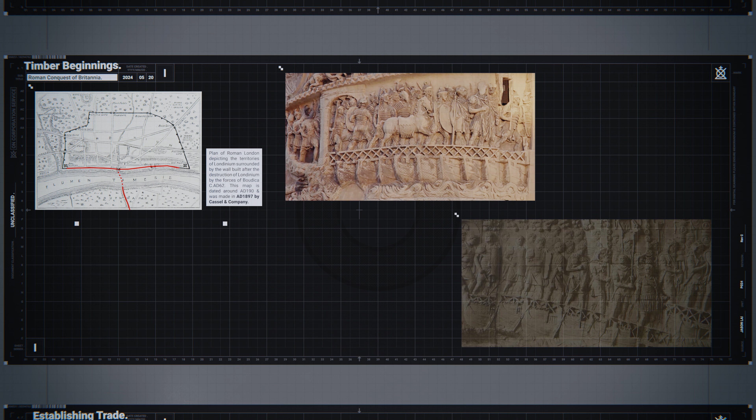In AD 75, after successfully invading the Celtic settlements, the Romans constructed a permanent bridge. Similar to the Rhine Bridge depicted by Palladio in 1570, it can be speculated that a similar Roman timber-piled bridge was deployed at a settlement to establish a permanent avenue for trade.

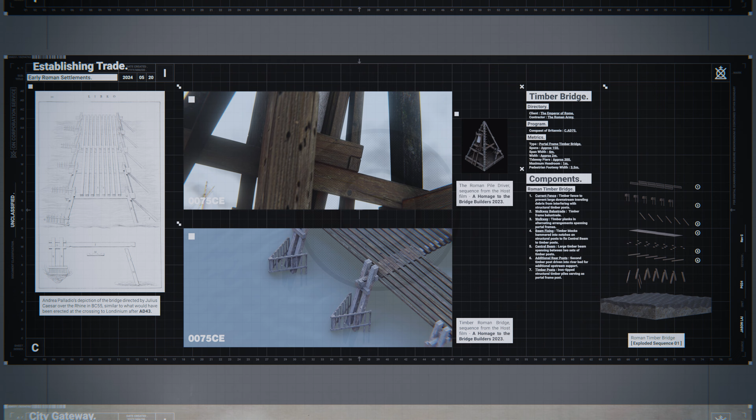In 1209, following the destruction of a series of intermittent timber bridges, the newly appointed Bridge House Estates funded the construction of a new permanent stone bridge. Built at the entrance to the City of London, it included a series of dwellings, shops, and a chapel, a small community created by the Bridge House Estates to generate income for the maintenance of the crossing.

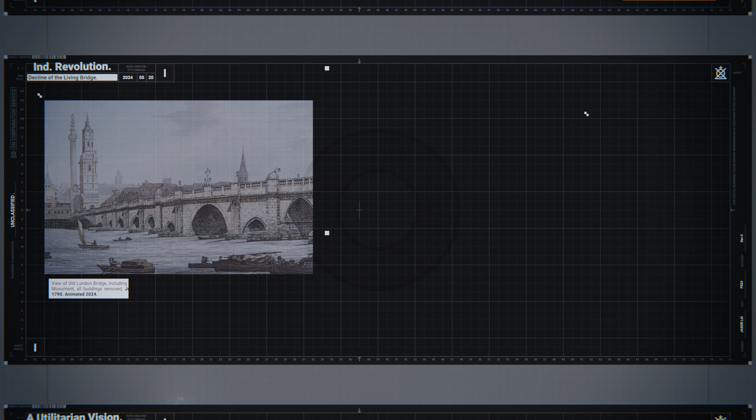The bridge became not only an entry into the city, but also a centre for community and trade. Old London Bridge grew under the stewardship of the Bridge House Estate, continually adapting its architecture over its 600-year tenure to suit the wavering zeitgeist related to its density, commerce, and vulnerability to fire. The bridge morphed as a product of its different eras, and a testament to its infrastructural and cultural significance to the City of London.

However, in 1831, following the removal of all buildings from Old London Bridge, the 600-year-old structure was nearing its obsolescence. During the first Industrial Revolution, a shift to utilitarian practicality saw a new bid to design a bridge with pure traffic and crossing capacity.

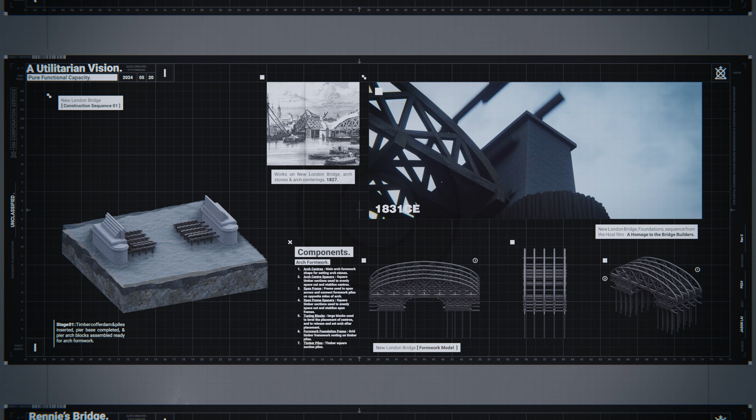New London Bridge was built west of Old London Bridge, allowing its predecessor to operate during its construction. The foundations were laid within a timber cofferdam to ensure the correct placement of its piles. Temporary timber structures called centres supported the stone structure until the arch was completed. This study highlights an interesting sequence of construction performance that is generally erased and forgotten after completion.

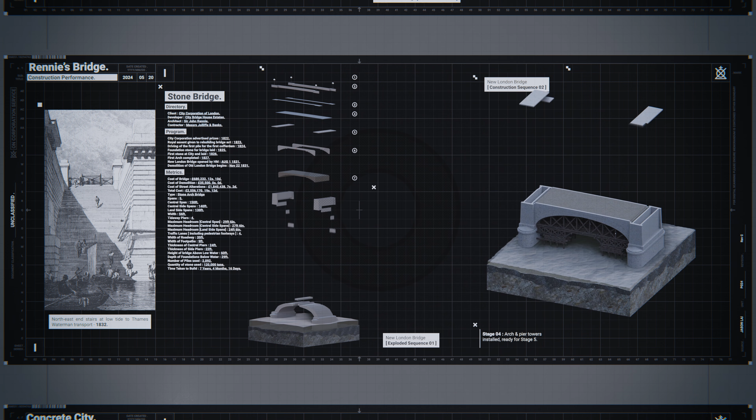Designed by John Rennie in 1823, this iteration focused on the utilitarian vision of the transport-centric connections of London's metropolis. Bridges increasingly took on pure transport functions to accommodate an increase in traffic, where habitation and community became less of a priority for the city. Rennie's vision was short-lived, however.

In 1962, cracks were discovered on the piers of New London Bridge, which was a result of the increased car-centric load of the Second Industrial Revolution. The bridge was once again obsolete.

The London Bridge Act of 1967 approved the replacement of London Bridge and the sale of the existing granite-faced stone to an American oil tycoon, to be reassembled in Lake Havasu, Arizona, continuing its capitalist legacy as a tourist attraction.

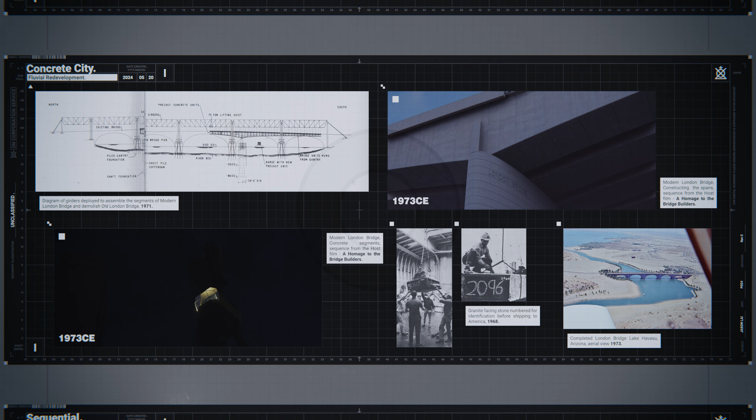The act was approved on the condition that the replacement remain at the existing location, to retain its pre-existing abutments and connections to operative road infrastructures, and without interrupting the flow of road or river traffic. The seemingly impossible task devised a series of 4 phases and a large temporary gantry.

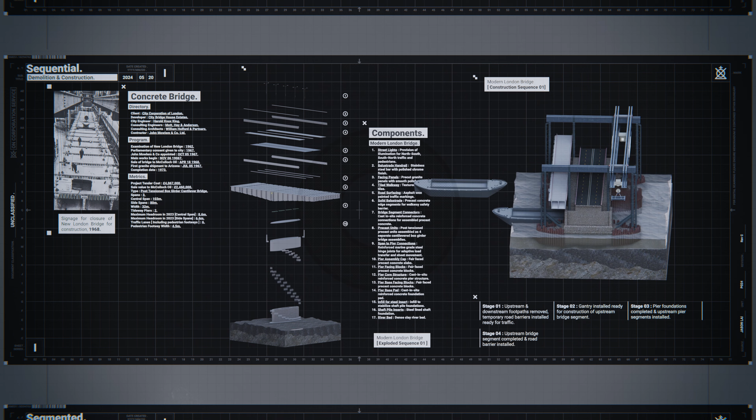The sequence began with the removal of the existing upstream quarter and the construction of the west span to partially divert traffic for the further demolition of the existing bridge. The downstream footpath of the old bridge was removed to enable the construction of the fourth span. Once completed, all traffic would be diverted to both perimeter quarters, leaving the existing bridge obsolete.

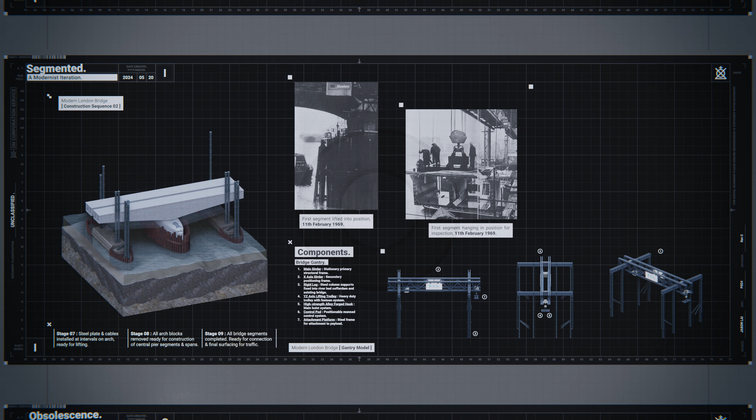The decommissioned bridge could then be demounted, utilizing the gantry to stabilize and lift the archstones out for shipping. Finally, the middle spans of the new bridge could be assembled. Connecting all quarters would mark its completion in 1973.

Discovered at the end of each precise analysis of historic case studies was a shift to obsolescence, the death of a bridge and the birth of a new one. The underlying notion of time and obsolescence in the context of hard infrastructure typically remains obscure due to its inherent prolonged lifespans. But through the study of the iterations over a substantial but precise timeline, we find the impermanence of infrastructure through its multiple failures caused by natural and societal systems alike.

Here, the site of London Bridge becomes an entryway into the new pedestrianised city, where the crossing not only serves as a physical connection between the south and the city, but also an ideological transition between two urban models.

Its persistence as a crossing and continual interactions with the river has developed a rich historical footprint, embedding the physical provocations of bridge building deep within the strata of the river, frequently overlooking the impact on natural systems with a central focus on the benefit of human interests.

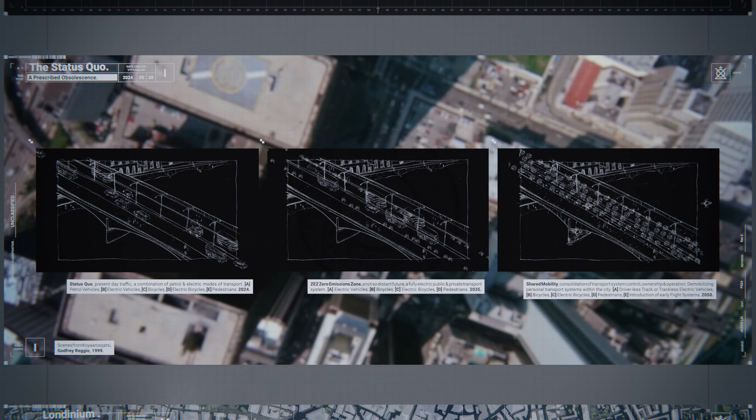In this new chapter of urban infrastructural organization, the definition of a bridge becomes dated. An obsolescence of the current crossing in 2050 is speculated through the rise in our adaptive approach to reuse in architecture and the death of the personal motor car. It explores the next iteration of the crossing as a monument to the past and a hub connecting people and new visions of inhabitable infrastructures.

Beginning an exploration into the possible variations of the next crossing, an emphasis on adaptation rather than radical change was discovered. Following the pedestrianisation of the City of London, the once neutral linear connection becomes polarised and updated to serve as a link between distinct urban typologies. The bridge once again becomes the gateway into a new established city.

Inspired by schematic subway maps, I was interested in exploring complex arrangement of programs in schematic form. Similar to the Halley VI station, this schematic for a mobile research apparatus investigates methods of adaptation to address obsolescence based on stimuli derived from historic and novel technologies. London Bridge represents artificial ground, suspended above the Thames, vertically connecting river, land and air.

In the second schematic, a discrete transportation conversion hub is proposed to diversify transport entering the city, utilising cofferdams at the existing fluvial footprint of London Bridge to connect tunnels to river to air.

The final schematic takes a less provocative and destructive stance. It acknowledges the territory and personhood of the river, establishing the river entity. The rights of the river become a significant driver in the types of construction or interventions taking place on the Thames. A retrofit strategy is therefore appropriate to address the obsolescence of the existing bridge, whilst acknowledging its boundaries and providing a suitable testbed for the reimagining of our transport crossings.

Inspired by the repertoire of metabolism in Rem Koolhaas's rehabilitative Project Japan, I took inspiration from the architectural interventions developed by the Japanese Metabolist group, presented in the Osaka 70 Expo and more notably in the independent works of Kisho Kurokawa. The typological distinction discovered sets the foundations of my design approach to the metabolist framework.

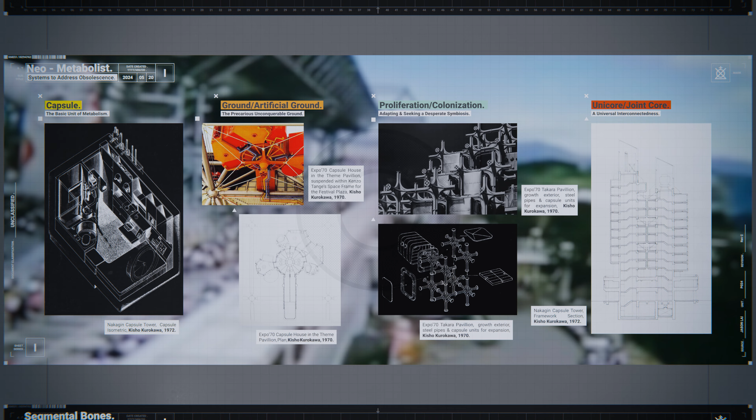Inspired by the photography of Todd McLellan's Things Come Apart, I began utilizing animation as a tool to explore the existing bridge. I classified the component categories and evaluated each family based on its value to the proposed conversion. This included structural, environmental, social, and non-human value.

The arbitrary measure utilized attempts to prioritize components for different R strategies to ensure proper recommendation is specified for each existing component. Functioning structural elements removed from the initial retrofit are certified and donated to the fictional city building materials depository. This prevents a devaluation of assets and generates a catalogue of certified bridge building materials ready for specification, offsetting the construction waste culture and embodied carbon emissions related to extraction and manufacturing of virgin components.

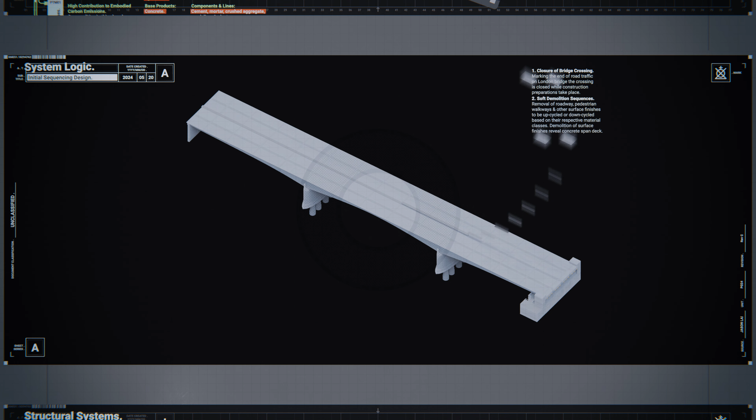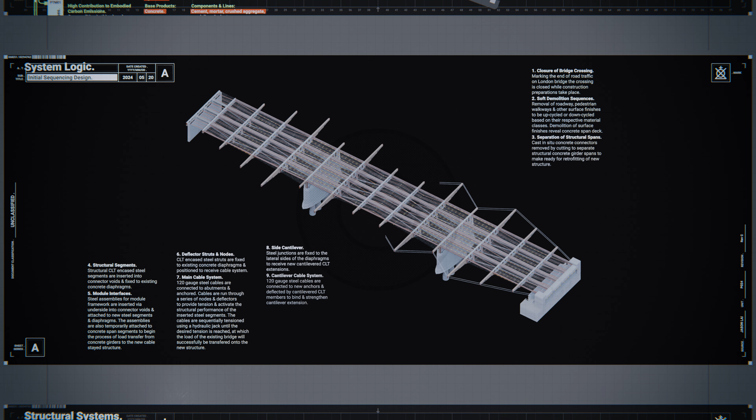Initial retrofit design imagined a sequential deconstruction of the existing bridge, retaining structural elements such as the pier, abutments, and diaphragms to minimize impact on the river entity. The soft demolition phase removes the finished elements before separating the three girder spans. New structures inserted between the spans and connected to the existing diaphragms, allowing the removal of the existing tendons, decommissioning London Bridge. Maglev track is installed to allow a permanent gantry to occupy the span.

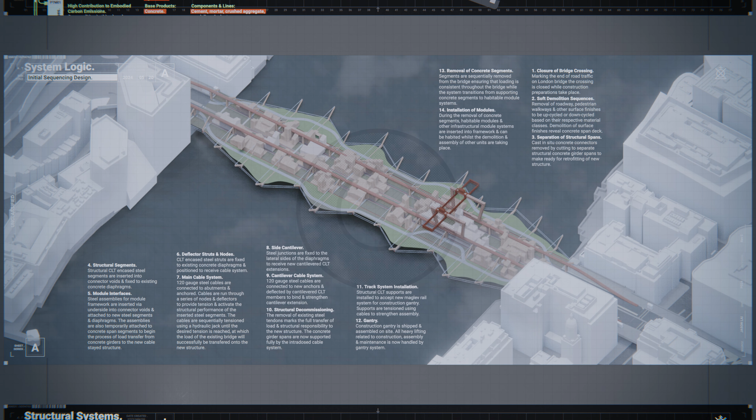The gantry system is used to convert existing girder cluster segments marked by interval diaphragms to habitable capsule unit zones. This initial process design is a linear progression, beginning at a deconstruction and ending at a habitable and adaptable artificial ground. Further iterations were developed alongside structural and environmental consultants.

The initial composite design attempted to mimic the clearance pattern of the existing bridge. However, this arrangement goes against the conventional truss span depth ratios and weakens the truss effect. Iteration 2 subverts Port Authority laws on central bridge height clearance to prioritize the habitable aspects of the bridge.

The intradosed system takes structural elements under deck, allowing a clear extradosed zone for habitation and reconfiguration. Additionally, the lightweight and slimline cable-stayed system is deepest at the centers, providing suitable framework cavities for capsules and other modular systems.

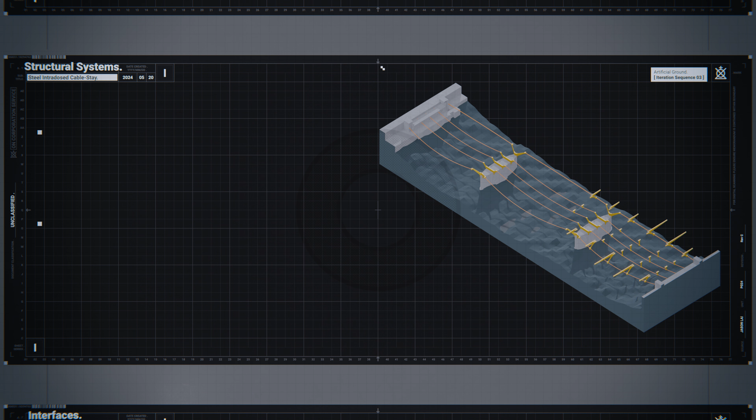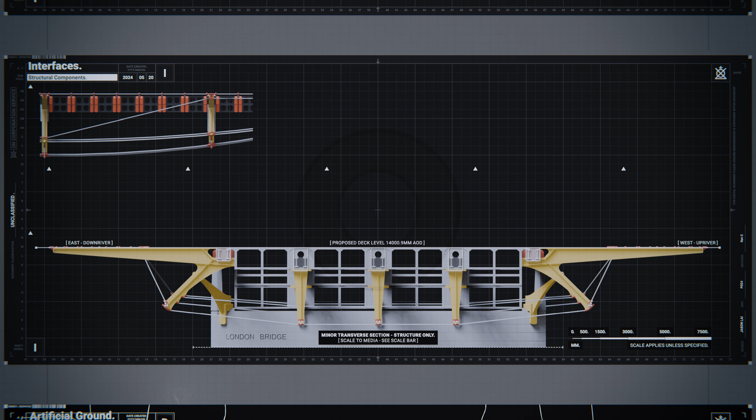Developed alongside an environmental consultant, Iteration 3 addresses the materiality of the framework, adopting high-performance steel components and coatings for bespoke structural connections and reclaiming universal steel components where appropriate for structural members. Attempts to offset high carbon emissions attributed to steel production by sourcing reclaimed alternatives or by improving the durability and lifespan of the framework. All node and deflector components are designed for ASTM A514 high-strength steel alloy with 1650 steel strands and twisted steel cables of various sizes.

Overcompensation in cable strength, alongside tension hydraulic adjustment systems, extends the lifespan of the framework, allowing it to adapt to different future load cases achieved with minimal calibrations. Integrated services embedded within the structural frame provide essential resources for habitation.

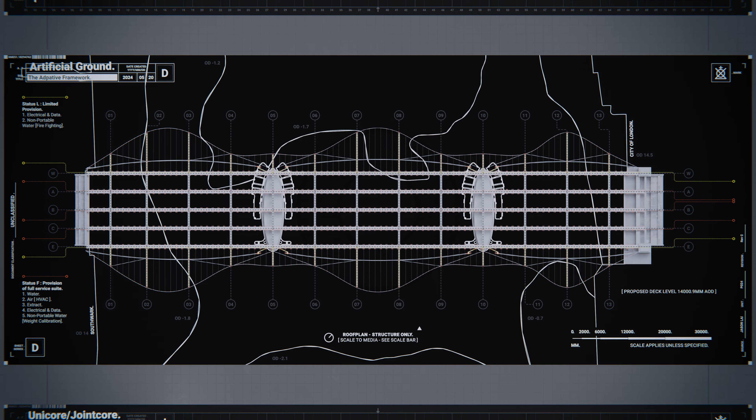Pressurized provision of water and waste systems counteract the effects of gravity in a horizontal unicore system, and a centralized fresh air heating and extract system keeps the interior spaces above dew point, utilizing the suite of environmental sensors embedded in capsules.

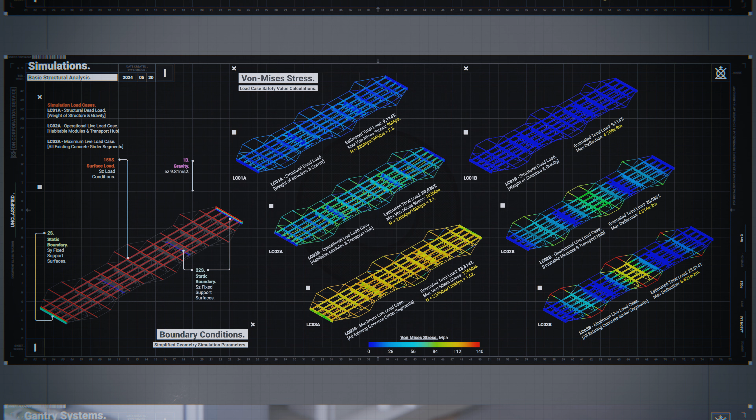Von Mises stress and deflection simulations were run in a cloud-based analysis software to visualize the impact on calculated load cases. Results suggested a 60% overcompensation for the maximum load case, which is beneficial for the proposed growth and expansion. However, if not under consistent loading or serviceability limit state, structural deformation could take place as an excessive positive camber increases the risk of material failure.

To address the question of achieving a consistent serviceability limit state, a permanent gantry system is incorporated into the design. Introduced in the early stages of the retrofit, the gantry is not only responsible for the initial conversion, but is also an apparatus for perpetual maintenance, recalibration, and adaptation.

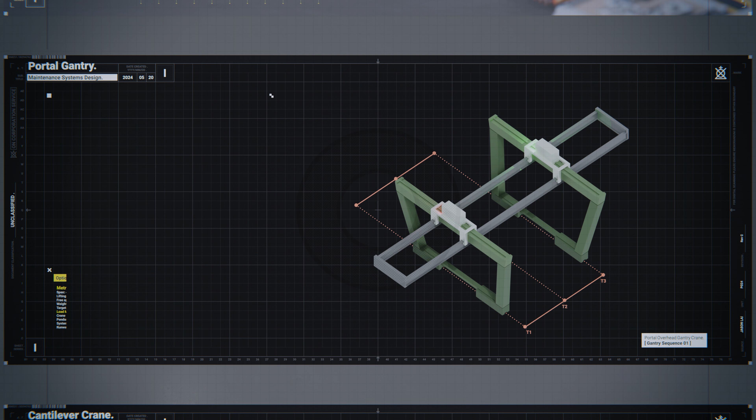Portal frame overhead gantry allows the movement of cargo laterally, making it useful for the rearrangement of module systems. However, the overhead gantry lacks maximum height adjustment options, making it susceptible to obsolescence.

The cantilevered gantry can be adjusted for height, whilst achieving its desired reach as the lower cantilevered section extends and upper section retracts to recalibrate its center of mass. However, this arrangement lacks the rotational or overhead transfer of cargo laterally.

The luffing crane allows the gantry to operate at a fixed level and achieves different height requirements with the articulated arm. What it lacks in load capacity as compared to the previous iterations, the rotational and precise articulation of the crane serves as more utility to the adaptive system.

To power the onboard maintenance and service systems, renewable energy is generated on the bridge, utilizing investments in private sector innovators to incentivize the development of clean energy to power transport and infrastructure.

A fictional solar tracking PV system designed and operated by Panasonic incorporates a distributed tracking system, allowing individual panels to seek the sun with integrated sensors and align their surfaces to obtain maximum yield.

Marine energy developer Open Hydro is commissioned to design and operate the marine mammal-friendly open center turbine generator, installed at the piers to generate and provide electrical energy for the inhabitants of the bridge.

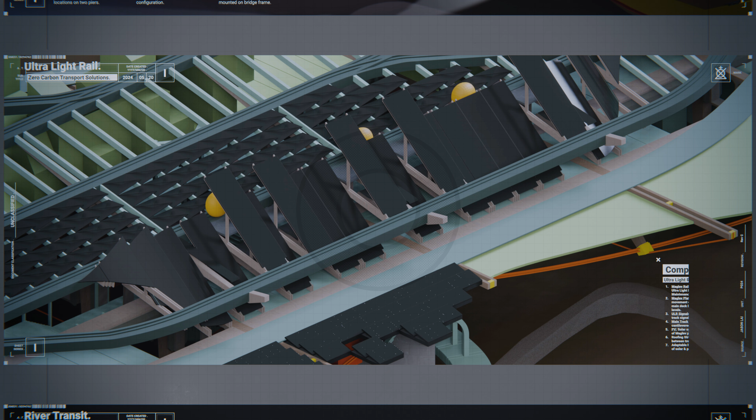Surplus energy is partially stored on board or sold to the city for further investment returns that are frequently reinvested in new visions of inner-city zero-carbon mobility.

The introduction of ultralight rail operated by Tesla and Transport UK features automated maglev platforms that seamlessly connects passengers to driverless pods running on the same track system as the gantry.

The reintroduction of the river hub diversifies cross-city commutes by utilizing the Thames and its bridges as conduits to traverse long distances, with connections to electric cycle and ultralight rail systems as last-mile solutions to connect commuters to their final destinations.

To address the building sector's issues of high material costs, energy consumption, and greenhouse gas emissions, the capsules are additively manufactured, utilizing 3D printing to achieve enclosure.

Integrated into this perpetual supply chain of turning waste into building materials, bioplastic materials and insulation sourced for the capsules are made from renewable biomass sources. These materials are biodegradable and have a lower environmental impact compared to traditional petroleum-based plastics.

Additionally, reclaimed steel is withdrawn from depositories when needed to captively assemble structural systems into capsules, embedding a prescribed obsolescence, prompting replacement when the closed system is no longer of value to the user.

Inspired by Dunne and Raby's United Micro-Kingdoms, in hopes to envision and integrate ideas of governance, equality, trade, and technology into this rediscovered city typology, in the year 2100, the fictional bridge is occupied by 4 politically polarized tribal entities. The new Metabolist Authority is tasked with the overseeing of maintenance, safety, and adaptation on board the bridge.

They operate mainly within the gantry and deal with the movement of capsules, recalibration of weight systems, and the occasional firefighting. The Eco-Urbanites Collective fully embraced the decentering of the human and operates a two-sided system of governance, which deals with the natural and the artificial.